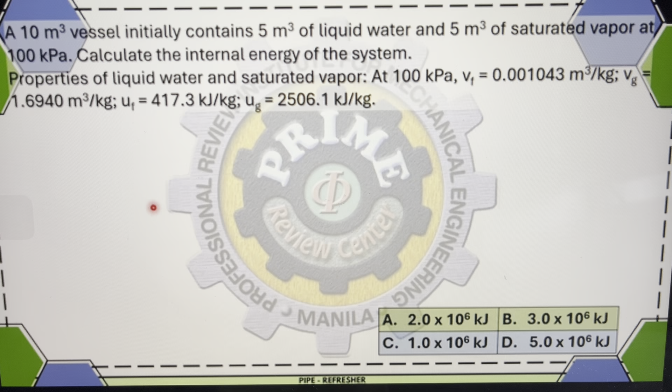So sa problem, given tayo dito ng properties ng liquid water and saturated vapor at 100 kilopascal, and yung properties nun such as Vf equals 0.001043 cubic meter per kilogram, Vg as 1.6940 cubic meter per kilogram, yung Uf naman is 417.3 kilojoule per kilogram, Ug is 2,506.1 kilojoule per kilogram. So given yung mga properties. So how are we going to solve this particular problem?

So since yung working substance natin is liquid water and saturated vapor, we cannot use yung ideal gas laws natin, yung mga paborito mo, kasi hindi siya applicable. So what we need are steam tables. So luckily, dun sa problem, given yung mga properties na kailangan natin. Ayan, so kung nalaman natin ang tubig na to, then what we needed to do is to know how are we going to approach to solve the problem. And so to solve this problem, we need first to know ano ba yung hinahanap. So yung hinahanap is yung internal energy ng system.

So tandaan natin, dun sa problem, dalawa yung working substance. Isang liquid water at isang saturated vapor. So therefore, yung internal energy ng system will come from dun sa dalawang working substance, which are yung liquid water and saturated vapor. Therefore, yung internal energy ng buong system is yung internal energy ng liquid plus internal energy ng vapor. So that's Uf times yung mass ng liquid plus yung Ug, which is yung internal energy ng vapor, times yung mass ng vapor.

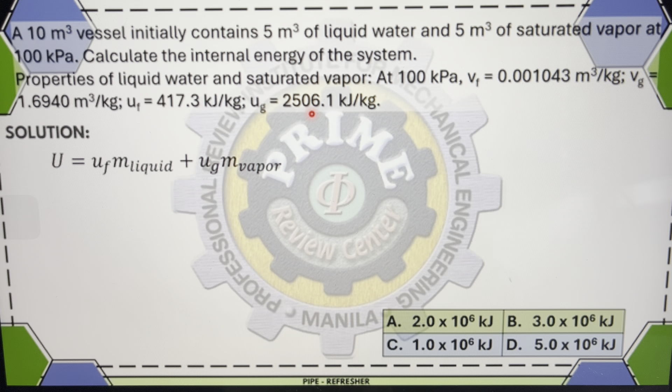Sige, so to solve this problem, what we needed to do is to check if those are given on the problem. So yung Uf and Ug are both given. Ang kulang lang natin is yung mass ng liquid at mass ng vapor. Kasi instead of mass, ang binigay sa atin ay volume. So ngayon, to solve those masses, we will recall yung formula natin ng volume. Pag water yung ating pinag-uusapan, kukunin natin yung total volume, di ba? Ano ba yung formula na yun?

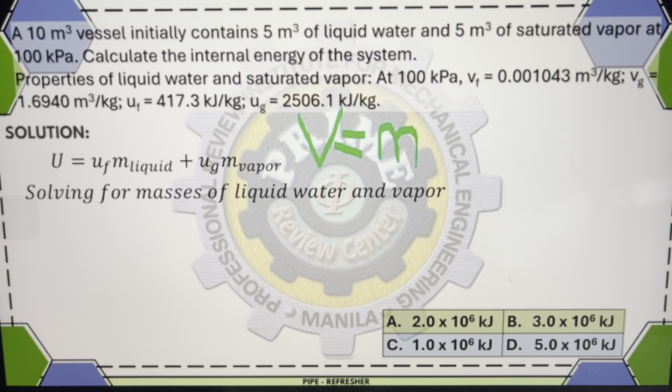So basically, ang total volume, ibahin natin yung kulay para makita. Ang total volume is equivalent sa mass times specific volume. So therefore, kung hinahanap natin yung mass, i-divide mo ang total volume ng specific volume. So kung liquid mass yung hinahanap natin, total volume ng liquid, i-divide natin sa specific volume ng liquid. And in this case, those are given. Volume ng liquid, 5 cubic meter. Specific volume ng liquid water, 0.001043. So makakompute na natin yung mass ng liquid.

Sige, so let us just do that. Yung 5, i-divide lang natin ng 0.001043. So pag nakuha na natin yung mass ng liquid, what we'll get is 4,793.86 kilograms. Kulang na lang natin ay yung mass ng vapor. Kung paano natin sinolve yung mass ng liquid kanina, ganun din sa vapor. I-divide lang uli natin yung volume, but this time for the vapor, divided by yung specific volume ng vapor, Vg, yun yung 1.694.

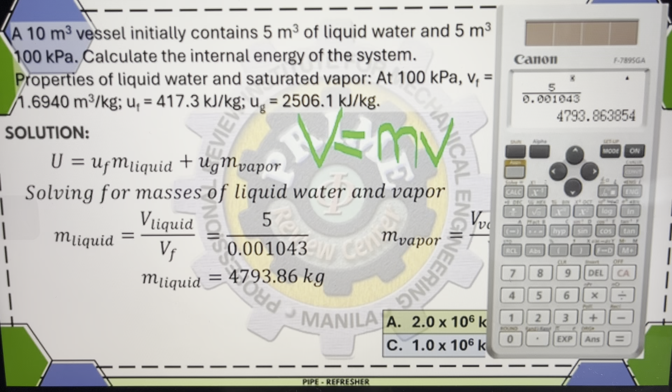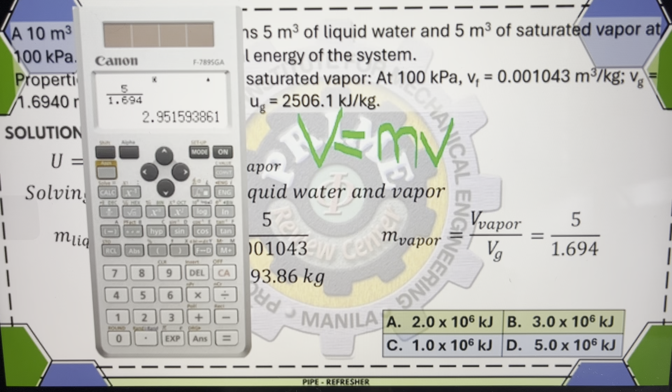So that's 5, yung volume ng vapor, divided by 1.694. Magka-cancel out yung cubic meter, so kilogram lang yung matitira. Kumpitin lang natin sa calculator: 5 divided by 1.694. Press equals, tapos para makuha yung decimal, F-D lang. Makukuha natin yung mass ng vapor natin being equivalent sa 2.95 kilograms. So meron na tayo ng ating mass ng vapor.

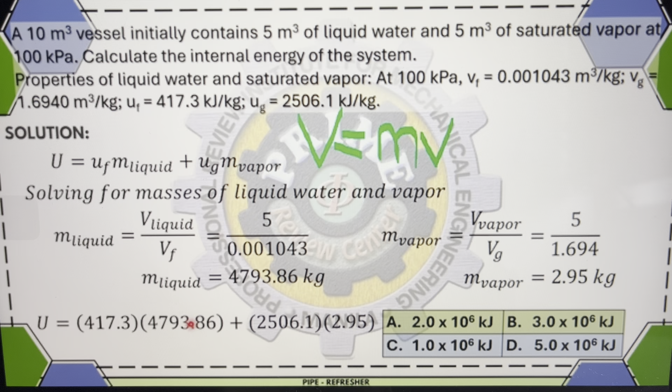Kung meron na tayong mass ng liquid, mass ng vapor, yung dalawang U ay given, this is simply direct substitution. So Uf, that is 417.3, times yung mass ng liquid, 4793.86, plus yung U ng vapor, 2,506.1, times yung mass ng vapor, 2.95 kilograms. So pindutin lang natin sa calculator: 417.3 times 4793.86 plus 2506.1 times 2.95. I-press lang natin yung equals.

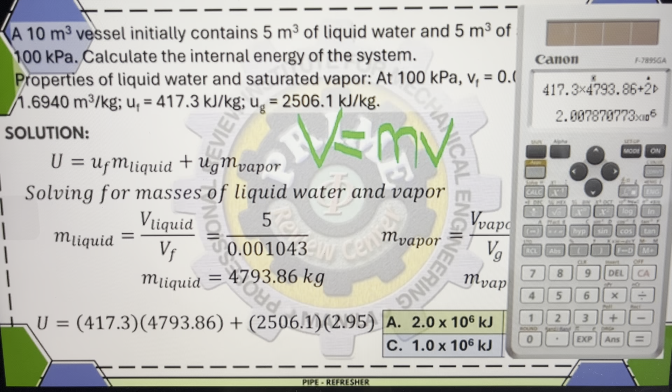Makukuha na natin yung sagot. To get yung scientific notation, press nyo lang itong F-D. So from the choices, yan yung ating letter A, di ba? So therefore, yung ating sagot is letter A.

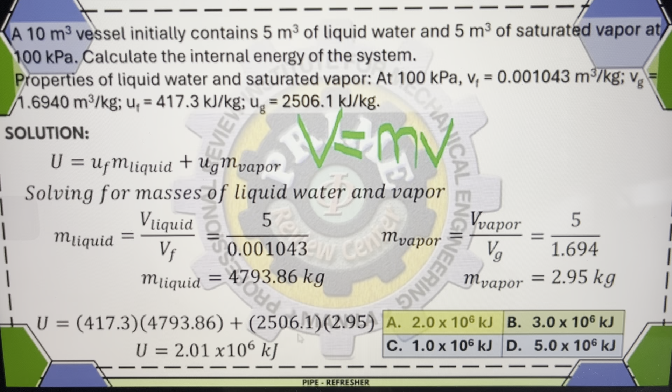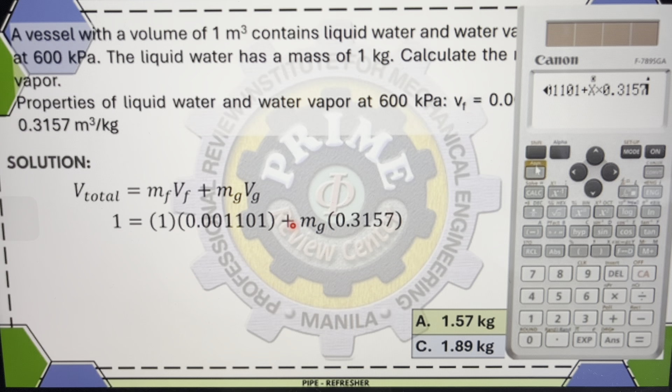Sige, solve lang natin. Lagay lang yung values. That's 1 equals 1 times 0.001101 plus yung mass ng vapor times 0.3157. So, i-shift solve lang natin to. Then, makukuha na natin yung value ng ating mass being equivalent to 3.16 kilograms. So, from the choices, yan yung letter D.

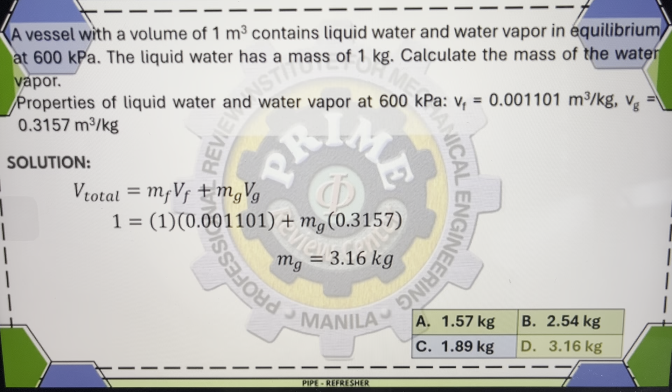And sige, another problem relating ulit sa ating PIPE, or rather, PIPE refresher, diba? So, let me read first the problem. If 6 liters of gas at a pressure of 100 kilopascal absolute are compressed reversibly according to PV squared equals constant until the volume becomes 2 liters. Find the final pressure.

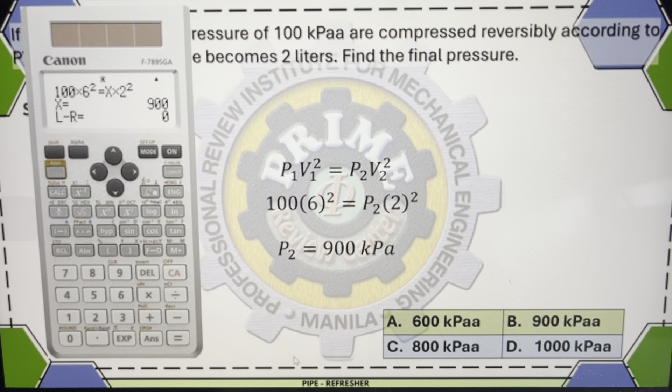So, lagay lang natin yung values. That is 100 times 6 squared. Equate lang natin dun sa pressure 2 times yung 2 squared. So shift solve lang natin to get our P2. Yung P2 makukuha natin equivalent sa 900 kilopascal. And from the choices, yan yung letter B.

And sige, another problem regarding sa ating PIPE refresher. So let me read first the problem. The flow energy of 124 liters per minute of a fluid passing a boundary to a system is 108.5 kilojoule per minute. Determine the pressure at this point. So naghanap ng pressure at some particular point dun sa ating fluid.

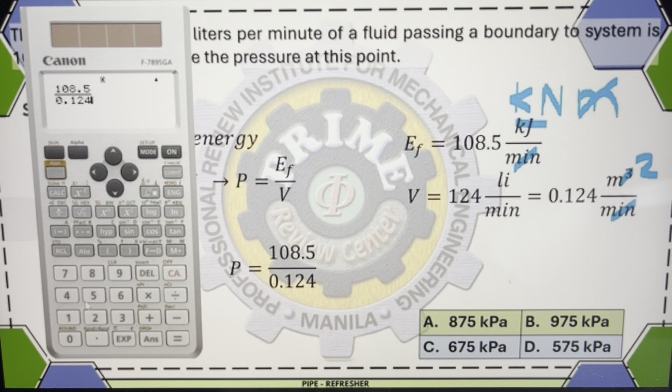So this is 108.5 divided by yung volume na 0.124. So simply press equals, makukuha natin yung pressure at this point as 875 kilopascal. And from the choices, yun yung letter A.

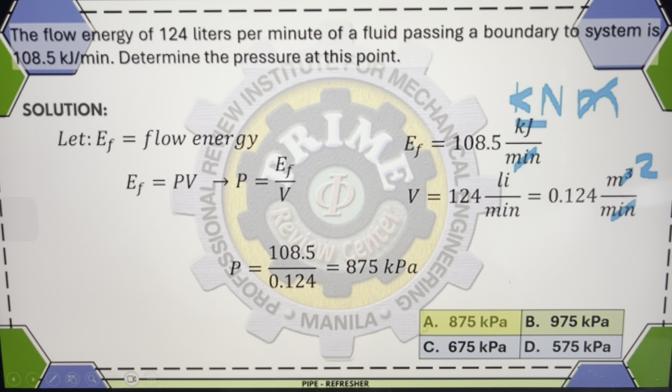Sige, so another problem from our advanced set. Babasahin ko lang. Work done by a substance in a reversible non-flow manner in accordance with V = 100/P, cubic foot, P in PSI.

So evaluate the work done on or by the substance as the pressure increases from 10 PSI to 100 PSI. So to solve this problem,

we need to recall yung tinatawag natin na non-flow work. So, ano ba yung ating non-flow work? Di ba yun yung PdV? Ngayon, kung na-recall na natin yung non-flow work na PdV, we need to consider kung meron bang binigay na equation sa problem. And in this particular example, meron.

So, saan yung binigay na principle na susundan natin para sa ating problem? Yun yung binanggit na V = 100/P. Yan yung formula natin. So, ngayon, try natin i-arrange itong equation natin into something na makikita natin na parang pareho sa mga principle natin. So, anong ibig sabihin nun, sir?

Try natin itong pressure, ilagay mo sa kaliwa. So, that means, magiging pressure times volume na, PV. So, magiging equal yan sa 100, which basically means isothermal yung process, di ba?

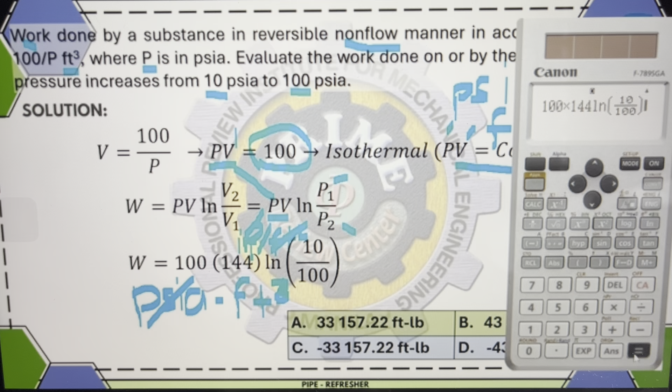Ganun yung gagawin natin. Ilagay lang natin yung values. So that is 100 times 144, times ln 10/100. So we simply press equals. Yan, makukuha na natin yung sagot natin.

And that is equivalent to negative 33,157.22 foot-pound. That is letter C from the problem.